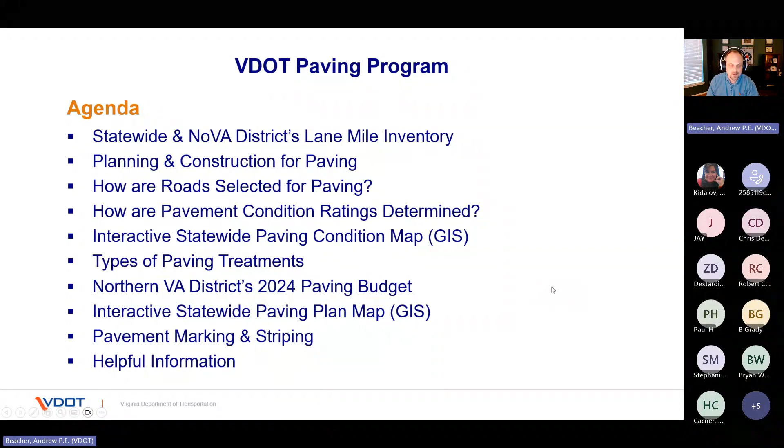Once again, good evening, everyone. I'm Andy Beacher with Virginia Department of Transportation. I'm going to go right into our agenda for this evening. I'll start by giving you some background information about the Northern Virginia District, as well as our paving program in general, and then review the upcoming 2024 paving budget, as well as the paving plan for this paving season. Then I'll wrap up by going over some helpful links, as well as contact information.

As you may know, when we talk about our roadway inventory, we discuss it in terms of lane miles. Overall, you can see how Northern Virginia compares to districts in the rest of the state in size and number of lane miles, with about 14,200 lane miles - so about middle of the pack, but obviously in a much smaller geographical area than the other districts.

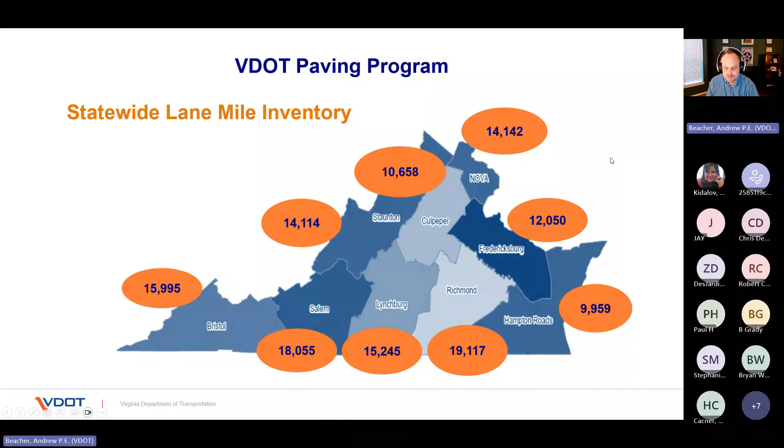If we break that number down by the 4 counties that make up the Northern Virginia district, a little over 50% of those lane miles are in Fairfax County. In Loudoun County, it's about 25%. In Prince William County, 22%. And Arlington County is 2%. One thing to keep in mind with that number is that Arlington County maintains their own secondary roads.

In general, for the paving program, while the construction period occurs during the warmer months from April to October/November, the planning that goes into that is essentially year-round. Starting in the spring, data is gathered for the next calendar year, and then later in the summer and fall, that data is reviewed, schedules and contracts are prepared and then advertised for bids, and prior year contracts are closed out. Finally, in the winter time frame, bids are received and evaluated, contracts are executed, and ultimately notice to proceed is given to the contractors for the next season.

A question we do often get asked is how roads are selected for repaving. Primarily, we look at the pavement conditions of that roadway using specific measurements we take in the field. However, in doing so, we also consider the roadway traffic volumes. Obviously, higher volumes are going to cause a roadway to deteriorate quicker.

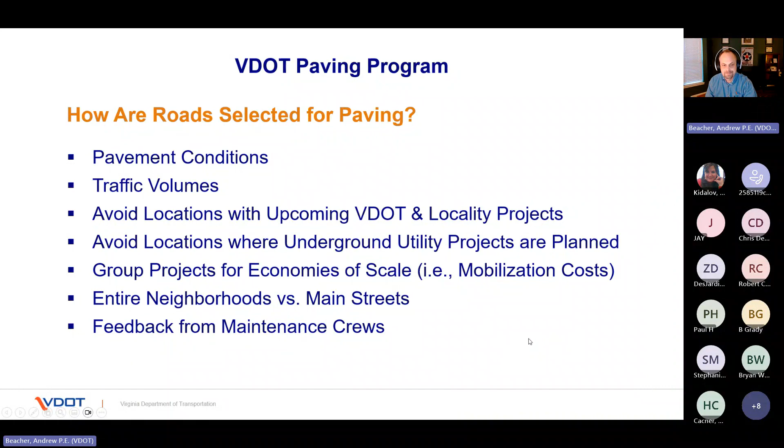It collects a number of different types of data in real time, looking at such things as pavement distress, roughness, texture, and rutting. And it uses various techniques such as digital scanning, digital measurements, video and imagery, as well as GPS.

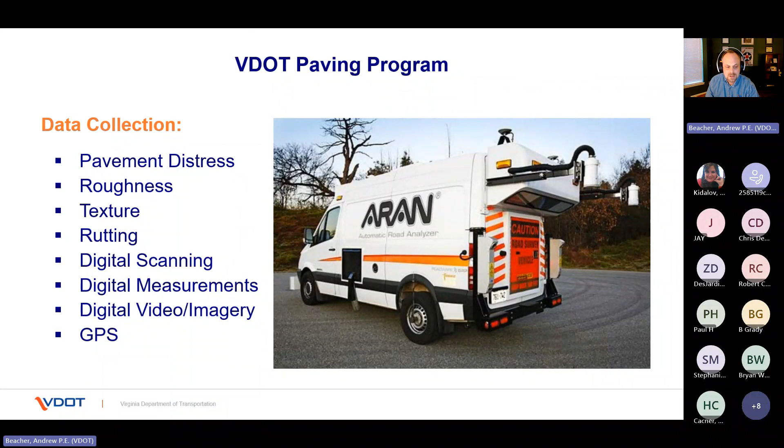As far as how often we collect this data, on an annual basis we will collect data for our interstate roads, our primaries, as well as our high volume secondary roads. When we say high volume, that means any highway that has an average daily traffic greater than 3,500 vehicles per day.

And then on our lower volume secondary roads, which is less than 3,500 vehicles per day, we do about 20% annually, so that in about 5 years we will have collected data on 100% of our secondary roads. The reason behind that is we have so many secondary roads that are low volume, but also they tend to wear more slowly than our higher volume roads.

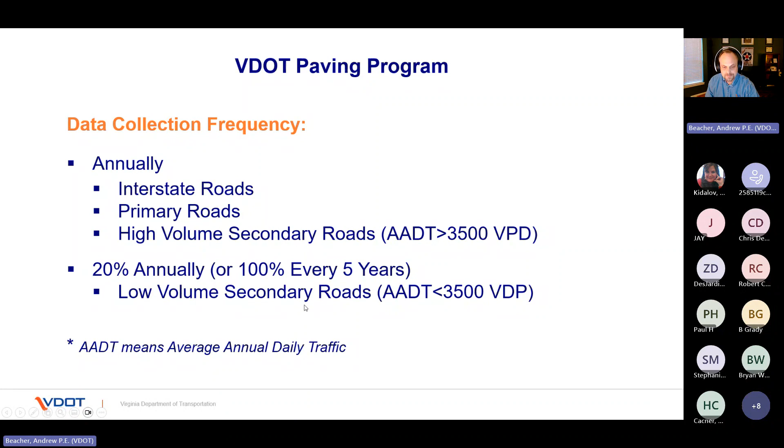The pavement ratings that we calculate themselves are based on what is called the Critical Condition Index, or CCI. Overall, any pavement with a rating below 60 is considered poor or very poor, and 60 and above is considered fair to excellent. We strive to keep all of our roadways in that 60 and above scoring criteria.

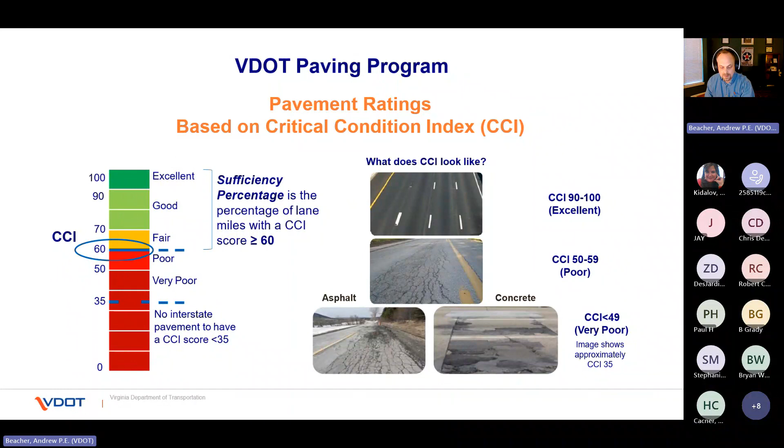As an agency, VDOT has set targets for each of its districts with respect to pavement sufficiency. For interstates, the target is to have 82% of all interstate roadways with a CCI of 60 or above. For our high volume primaries, the target is also 82%. For the low volume primaries, it's 75%. High volume secondaries is 82%, and then the low volume secondaries is 60%.

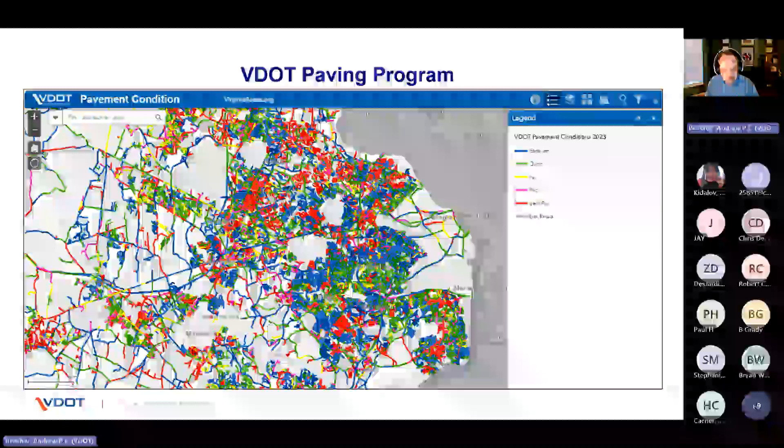Obviously, we do still have a lot of work to do out there, and we'll continue pushing to try and get rid of those red colors as much as we can.

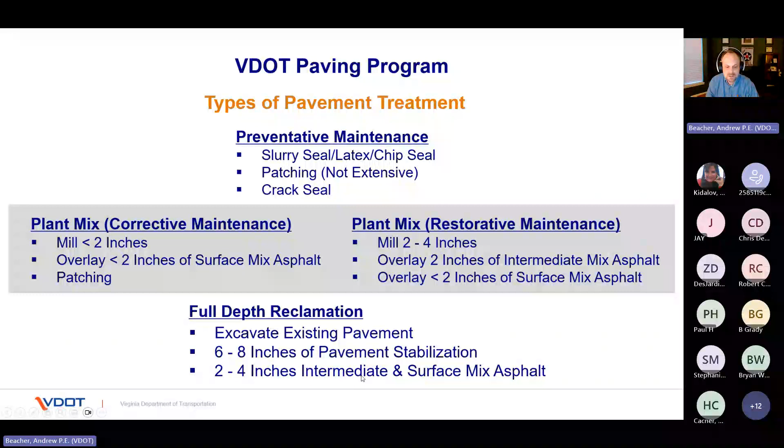There are instances where we have a roadway that is in pretty bad shape. It is rare because we're trying to maintain them to the highest standard that we can. But in those instances, we do something called a full depth reclamation, where we actually excavate out the existing pavement, put back 6 to 8 inches of pavement stabilization, and then 2 to 4 inches of intermediate and surface mix asphalt.

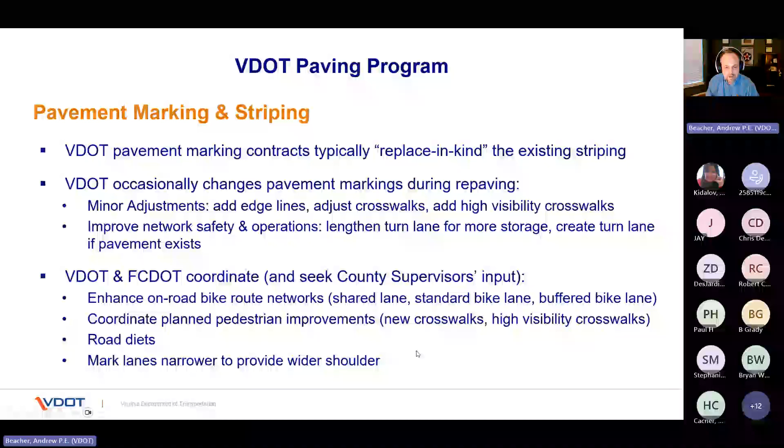When it comes to pavement marking and striping, the way our contracts are set up, we typically replace in kind the existing striping. Occasionally we're able to make minor changes during repaving, but more elaborate changes, such as those for bike lanes, new crosswalks, road diets, etc., require significant prior planning and coordination between the county and VDOT. So if one or more of these significant changes is requested on a road scheduled for repaving, what we typically do is defer that work to a future year to allow appropriate time for planning and analysis to make sure what's being proposed is safe and effective for the traveling public. I think Hannah is going to go into a little more detail about proposals related to those types of initiatives.

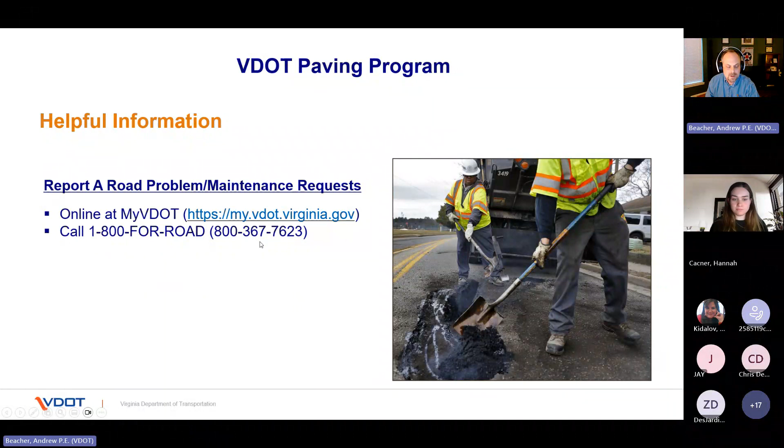My concluding slide here is just showing you some useful links and phone numbers to take advantage of. If you do see an issue out there on the roadways, you can go to our MyVDOT webpage, that's my.vdot.virginia.gov, or call our 1-800 number, 1-800-FOR-ROAD, that's 1-800-367-7623.

And I think I'm going to wrap up there. Normally I like to do a live demonstration of the paving plan map that's available on Virginia Roads, but unfortunately I wasn't able to access that tonight. I'm having a glitch with my internet access here. So if I can pull it up later, I will see if I can do that. But for right now, I think I'll go ahead and wrap up and turn things over to Hannah.

Thanks, Andy. Okay, can everyone see my screen there? Yes, yes, I can see it. Excellent, thank you. All right.

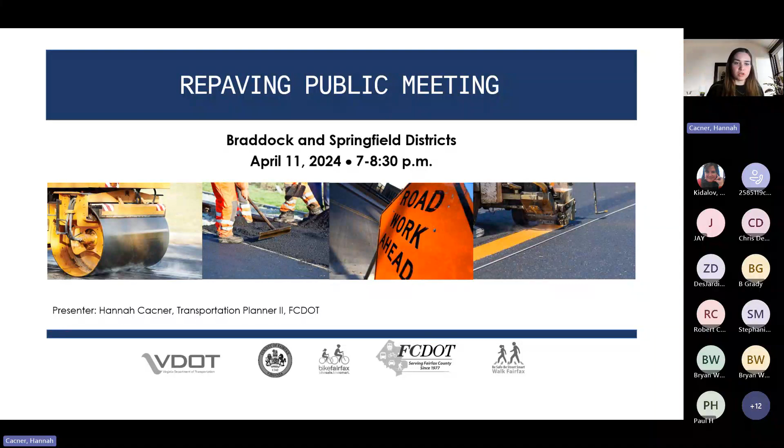At this point, I'm just going to move on to FCDOT's proposed striping modifications as part of the 2024 repaving program. I'll start off with a little background on Fairfax County's role in the repaving program. Each year, we collaborate with VDOT to provide new striping improvements on our roadways. Typically these are in the form of crosswalks and bike lanes, but we're limited to roadway segments that VDOT is already repaving, so any proposed crosswalks or bike lanes must fall within the area VDOT is already repaving. Also of note, the scope of this project on FCDOT's end doesn't extend beyond adding striping to the roadway, so improvements like protected bike lanes or sidewalks are not something we're able to add through this program.

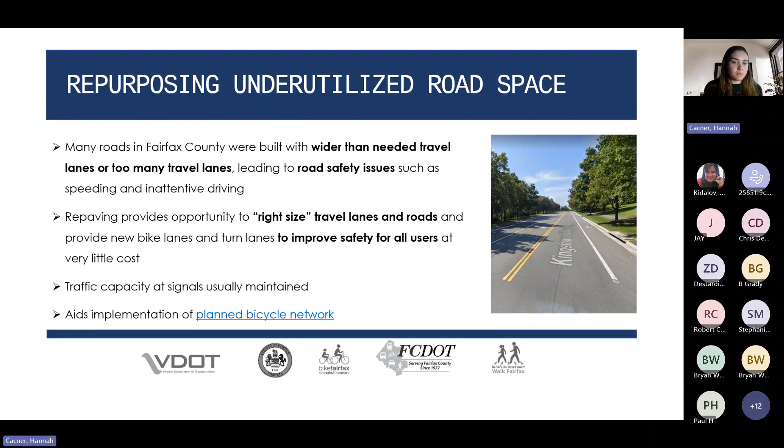A major reason we do things like adding bike lanes and road diets is to repurpose underutilized roadway space. Many roads in Fairfax County were built with much wider travel lanes than necessary, or with too many travel lanes, which can lead to safety issues like speeding or inattentive driving. The repaving program allows us to bring lane sizes down to a more appropriate size by adding improvements like bike lanes, making the road appear more narrow and improving safety for all users at relatively little cost. Typically, traffic capacity at signals is maintained, and we try to maintain legal on-street parking where space allows. Adding bike lanes through the repaving program also aids in implementing our planned bicycle network for the county.

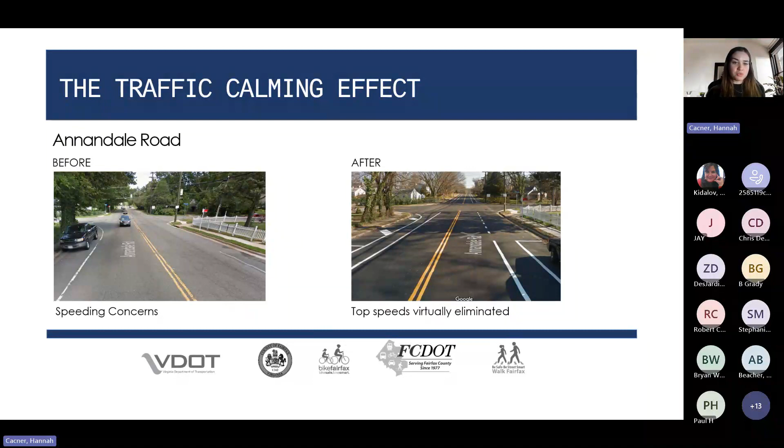As you can see from this photo, you get a nice traffic calming effect through adding bike lanes, as we did here on Annandale Road through the repaving program. With that additional striping, drivers are given a visual impression that the roadway width has been reduced, which has been shown to slow vehicle speeds.

These are the three types of on-street bicycle facilities you'll see here in Fairfax County. We typically don't add sharrows and are trying to move away from standard bike lanes, with the goal of adding as many buffered bike lanes as possible, to give cyclists additional separation between themselves and the vehicle lane, providing a more comfortable experience. Although this program only allows us to stripe bike lanes, adding a buffer where possible gives us the option in the future to protect the bike lane by adding physical barriers through other projects.

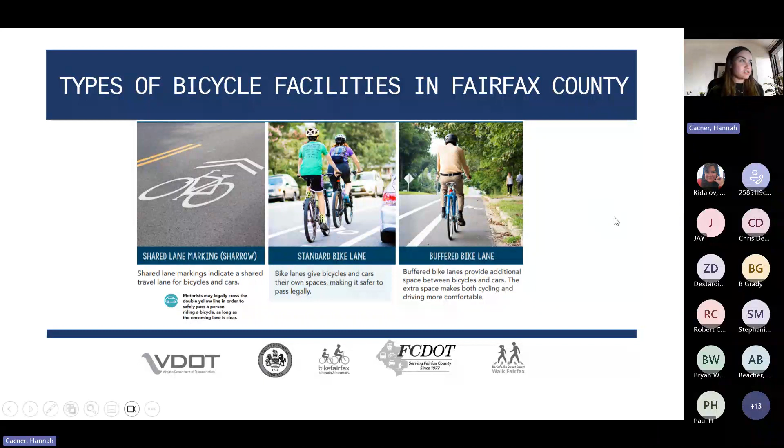This diagram shows a categorization of the four types of cyclists we typically see. While we're not able to build trails or protected bike lanes through the repaving program, we are trying to provide as many standard and buffered bike lanes as possible. But with our standard bike lanes, our primary users typically fall into those two groups at the top there.

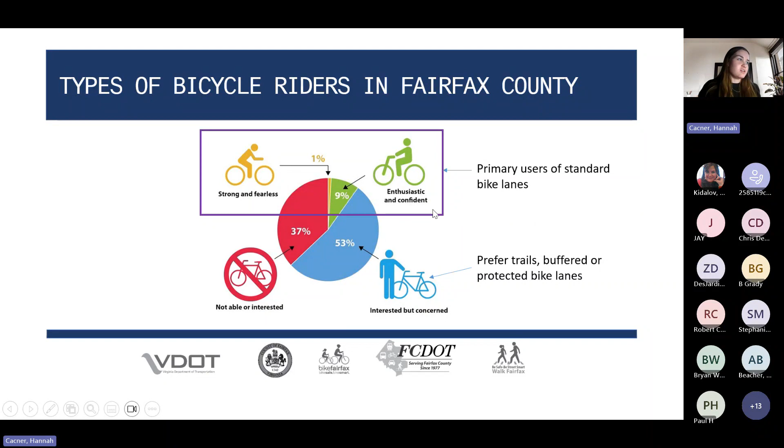These are just a few benefits of adding bicycle infrastructure. As you can see, there are benefits to all roadway users and not just cyclists. The bike lanes provide a nice traffic calming effect by making the roadway appear narrower to drivers. Another benefit I like to highlight is that bike lanes can make a road feel safer for pedestrians by providing a buffer between pedestrians and vehicles, and by minimizing a pedestrian's exposure to traffic when crossing the street and giving them a better vantage point of oncoming traffic.

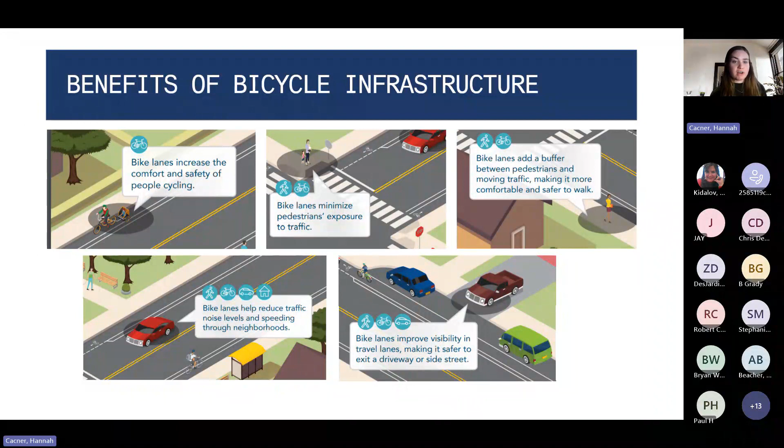Moving on to our proposed striping modifications in Braddock District. First up, we have a proposed bike lane project on Heming Avenue between Braddock Road and Heming Place.

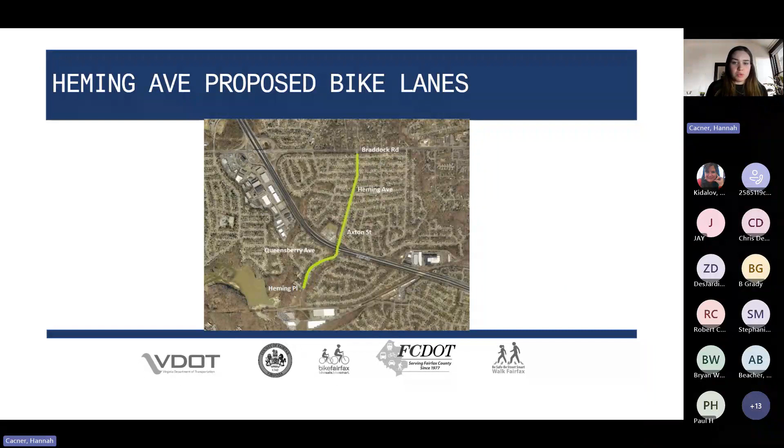Currently, this segment of Heming Avenue has two very wide travel lanes with on-street parking on both sides of the street and sidewalks on both sides, aside from a half block where there's some missing sidewalk between Jervis Street and Braddock Road. Currently, there are no on-street bike facilities and there are three existing crosswalks on Heming.

Adding bike lanes would provide connections to existing bike lanes on Queensberry Avenue, as well as to North Springfield Elementary School, Lake Accotink Park, and some future asphalt paths planned along the side of Braddock Road.

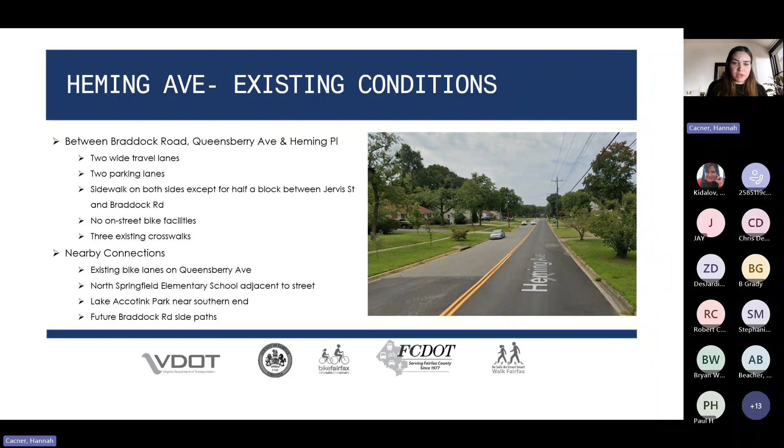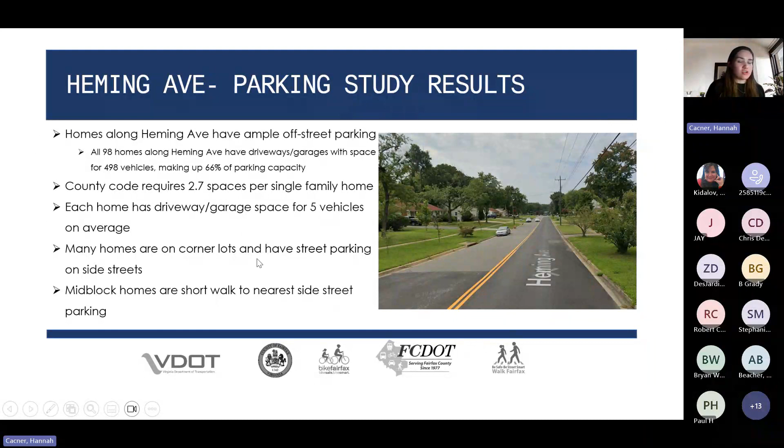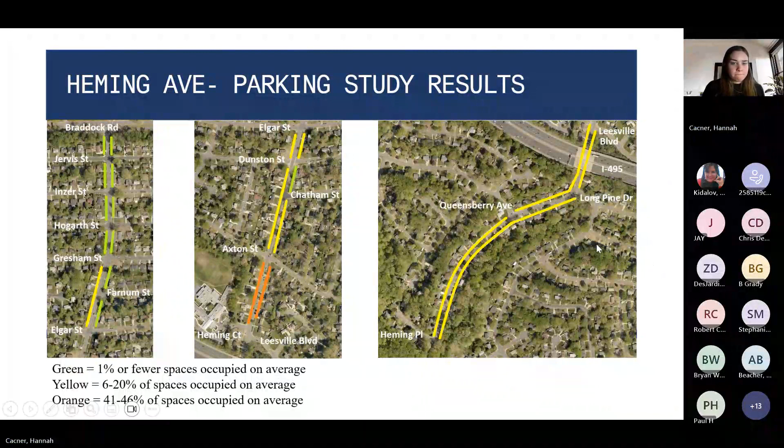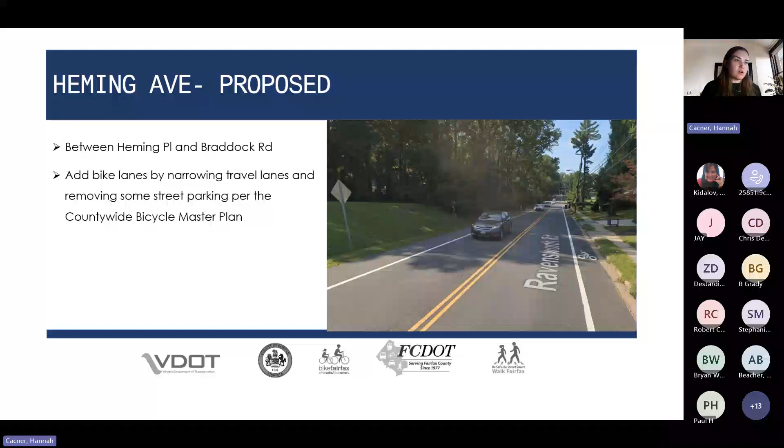So what we're proposing here is adding bike lanes by narrowing travel lanes and removing some street parking per the county-wide bicycle master plan. If implemented, they would look something like these bike lanes on Ravensworth Road that were also implemented through the repaving program. Unfortunately, the road is not quite wide enough to do a buffer, so they would just be standard bike lanes.

In order to do that, we have a few different options. We have instructions at the end of the presentation on how to vote and provide input on each option through an online survey.

The first of these is to add bike lanes between Heming Place and Braddock Road, but retain the southbound parking bay between Axton Street and Heming Court. Essentially, we would be repurposing all of the street parking except for the most heavily used segment. As a result, the bike lane would run uphill, but cyclists would share the street going downhill and would not have a dedicated lane in that segment, retaining parking on one side of that road.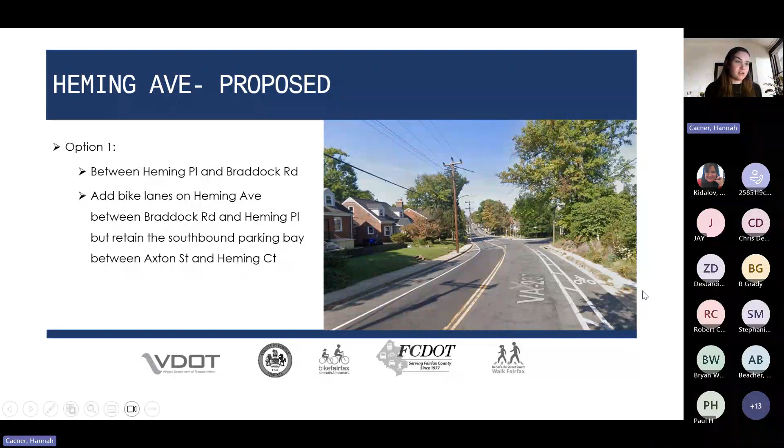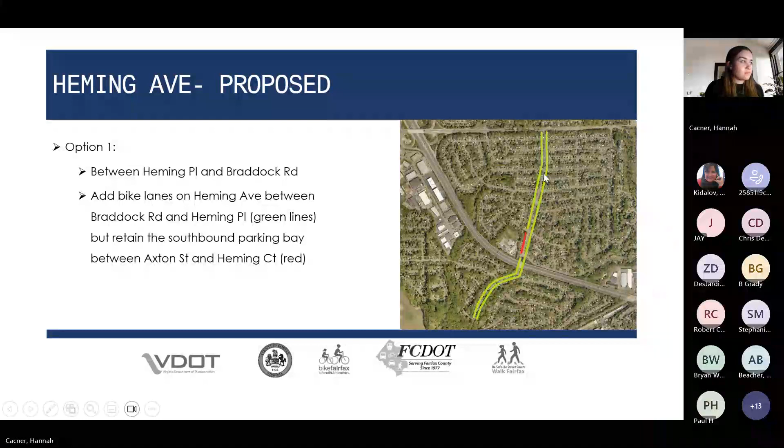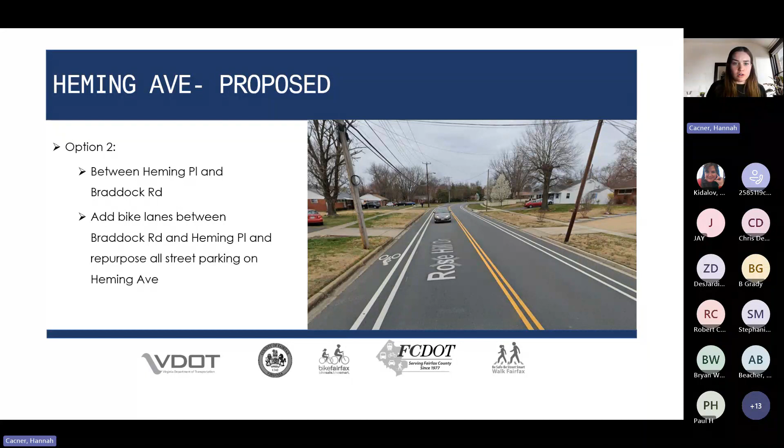Our second option is to add bike lanes along the entire stretch of Heming Avenue between Braddock Road and Heming Place, repurposing all of the street parking.

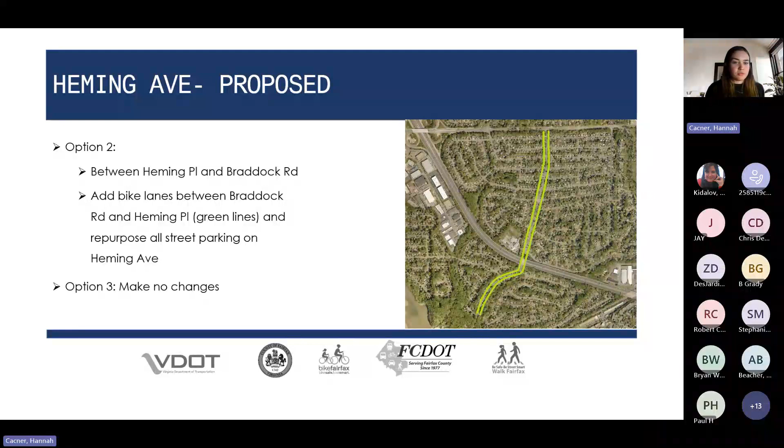So the bike lanes would run along that entire segment in green. I'll also add that there is a third option to just repave the road as is without adding any bike lanes, removing no parking, and that will also be listed as an option on the survey. Again, whichever option we go with will depend heavily on community input.

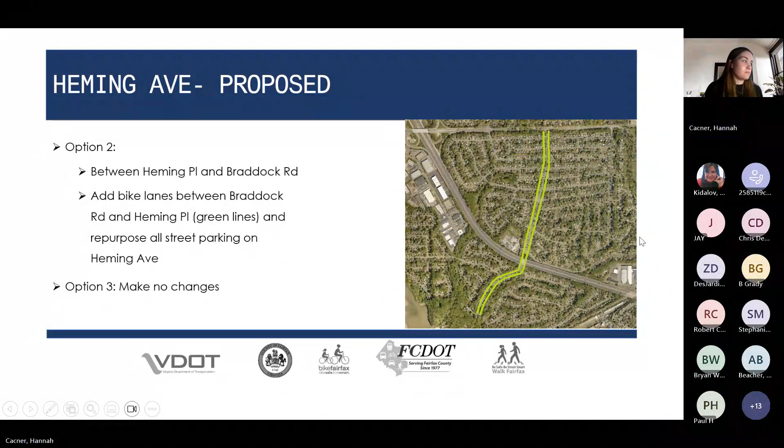Crosswalk enhancements are another opportunity to improve pedestrian safety through the repaving program that we have. Sometimes we'll have to restrict parking on the approach to a crosswalk to comply with the state code so that a parked vehicle will not obstruct the view of a pedestrian in the crosswalk from other drivers.

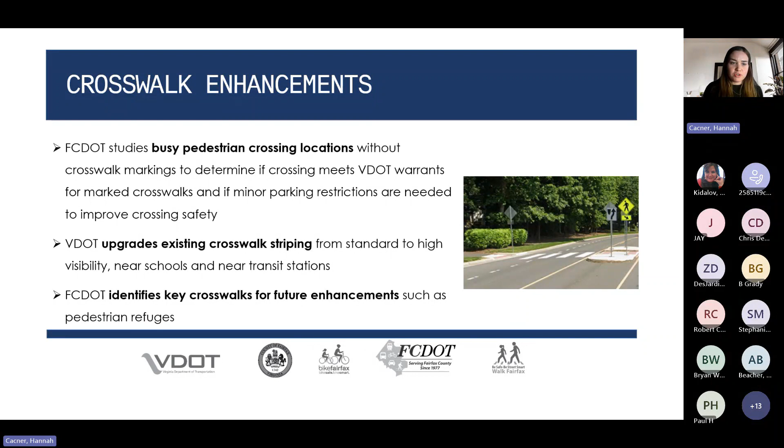We will also sometimes upgrade existing crosswalks to high visibility, like the one you see in this photo. And we'll look for opportunities to add striping for future pedestrian refuge islands. Although we can't add the actual pedestrian refuge island like this one you see in the photo, we can at least do the striping to reduce costs in those future projects.

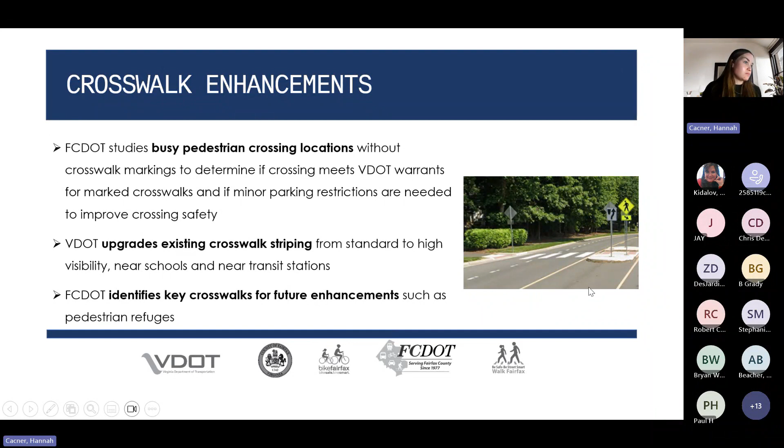We have another proposed crosswalk at Heming Avenue and Elgar Street, and adding this crosswalk would also require us to repurpose a little bit of street parking. That would be 5 spaces on the southbound side and then 6 spaces on the northbound side.

Our third and final crosswalk that we have proposed in Braddock District is also on Heming Avenue at Axton Street. This one would require repurposing 10 spaces on the southbound side of the street and 5 spaces on the northbound side of the street.

We are also proposing 1 crosswalk in the Springfield district at Center Road and Garden Road. For this one, we would need to repurpose 7 spaces on the eastbound side of the street and then 2 spaces on the westbound side of the street.

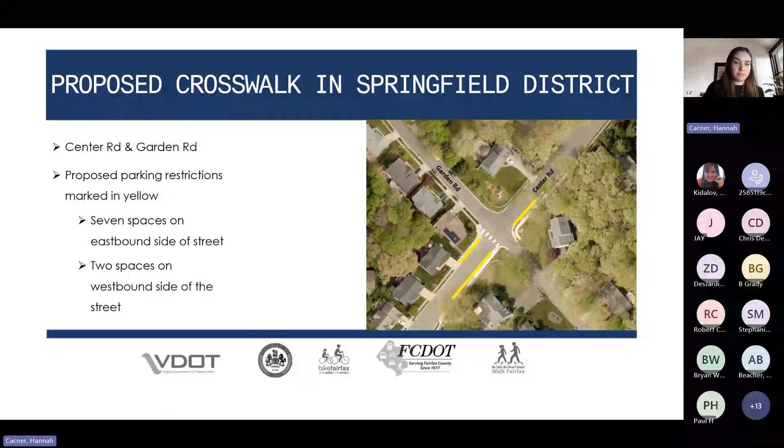We welcome any and all feedback and are accepting comments until April 25th. This will all be collected and passed along to Supervisors Walkinshaw and Herrity, who will make a final decision on everything in their respective districts.

Before I move on to the question and answer portion, as I mentioned, we'll be collecting feedback for the next 2 weeks. This year, in addition to accepting any feedback over the phone and by mail, we're also accepting surveys via a platform called Public Input.

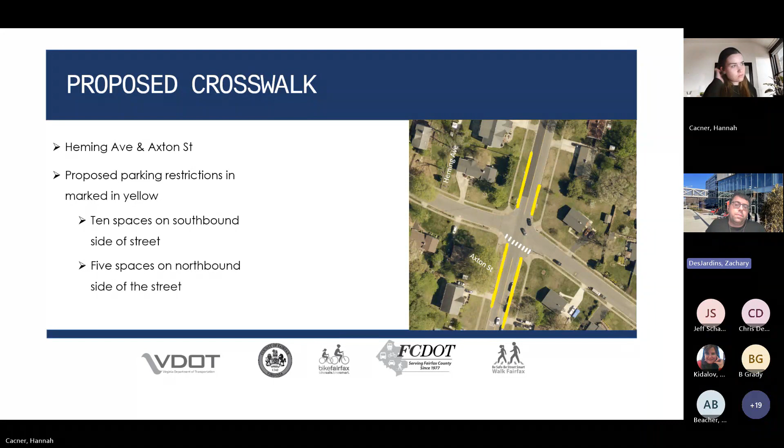But then on one of the proposals, on one side of Axton was going to be the parking. Is that -- yeah, so depending on the feedback we get, the idea was we wanted to provide people an opportunity: if they want to support a crosswalk only, they can do that. So if we were to implement the crosswalk or crosswalks at Axton Street and restrict the parking, we'd be able to do that regardless of what people thought about the bicycle lane. That's why we've got them both.

So if we were to do the bike lane, it would be on the uphill side, the right hand side of the street. We would retain the street parking, but it would only start essentially where the end of that yellow bar is on the left side, because we couldn't put parking in the crosswalk area. It's a state requirement. So that's how it would work.

Okay, so these parking restrictions are basically assuming there are no bike lanes and we're not restricting any parking, correct Zach? Yes. Okay, thank you. Does that answer your question? Yes, okay.